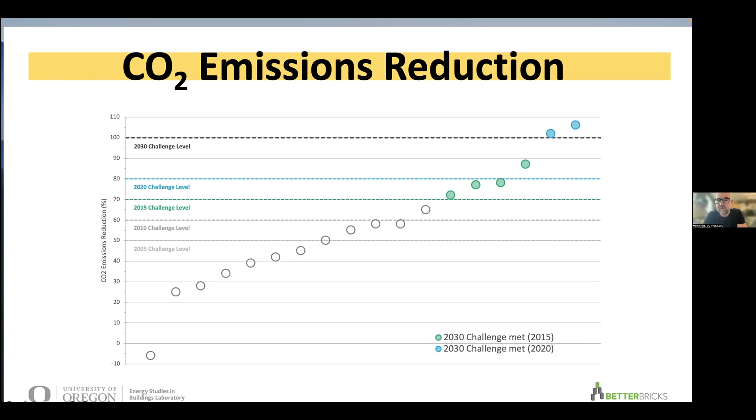This year we have 2 standout projects that met the overall 2030 challenge with net positive performance, reporting 106% and 102% CO2 emissions reduction. These 2 projects are both very ambitious and should be commended for the achievements they've made. There were 18 total submissions, and the total emissions reduction from all projects combined came out to 10,340 tons of carbon dioxide across the 18 projects.

6 total projects meet the 2030 challenge for their respective 2015 and 2020 levels. 2 projects were built to and meet the 2020 challenge level, which is 80% reduction, while also meeting the 2030 level, 100% reduction net positive. 4 projects were built to and meet the 2015 challenge level, which is 70% reduction.

The total area of the 6 projects that met their respective 2030 challenge levels was just above 1 million square feet, which is about 40% of the total building area across all submissions. This represents very impactful work occurring in the Pacific Northwest.

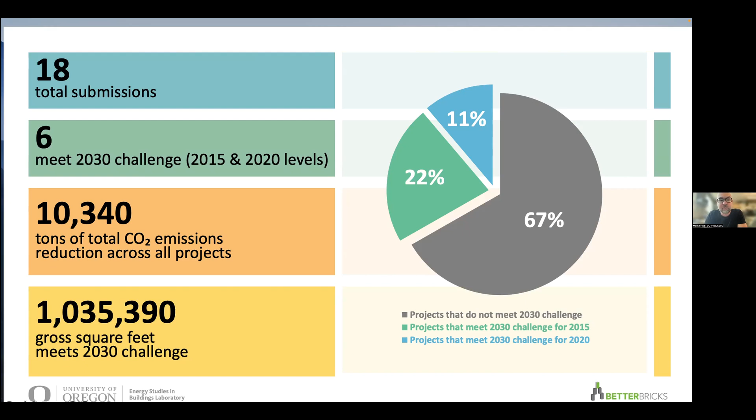A quick check of the 2030 pulse for our region. These numbers are the average CO2 reductions binned by performance and compared to CBECS baselines or calculated baselines via tools like the Zero Tool. Average CO2 reduction from all submissions is 56%. Average CO2 reduction from the 6 projects that met their respective 2030 challenge level is 87%. Average CO2 reduction from the projects that do not meet the 2030 challenge is still at 41%.

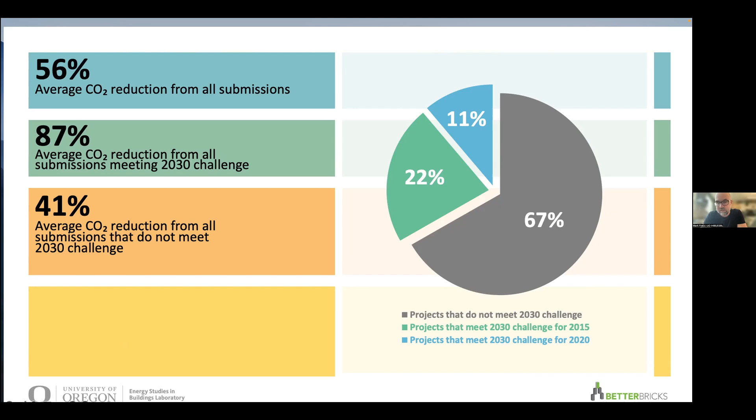Based on these calculations, the winning project, which you'll hear more about today, is a 2-story office building that is targeting net zero energy. It is a resilient design that will serve the Oregon Treasury Department's mission to be fully functional during and after a catastrophic event. The facility was designed to be a low energy building with an EUI of 26.9, and after energy offset from the on-site PV array, the project is anticipated to reach net zero energy on an annual basis.

In addition to net zero energy, the facility has achieved a platinum rating from the U.S. Resiliency Council, which is the highest rating possible, and the first building in the country to receive this distinction for base isolation. In terms of energy modeling, the project went through an extensive modeling effort to identify a multitude of solutions to make the building structurally and operationally resilient.

Some of the strategies and design features include a microgrid controller and energy management system to optimize building performance and resource utilization. So we would like to give a warm congratulations to the GBD Architects project team, and I'm going to hand it over now to see more about that project.

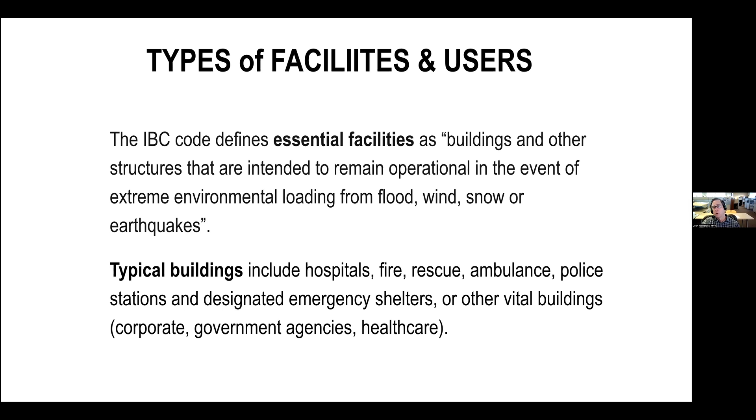But what we've done here is gone above and beyond just what a code building requires. I'll hit on that in a few minutes. We've actually targeted an exact performance for this structure through the use of base isolation, to remain completely operational, limiting damage not only to the structure, but more importantly to the non-structural pieces of the building.

And why the Oregon State Treasury? It's a question that comes up. Why would the Treasury need a resilient building? There are lots of reasons, a few of which are outlined here. But most importantly, I think if we do have a major seismic event here in the Pacific Northwest, those emergency dollars are going to need to be distributed to the people that need them most, and the Treasury is a huge part of that.

That's one thing I don't think a lot of people think of top of mind when you think about people in need after a large major environmental event.

As Mark mentioned, the Oregon State Treasury building is a 36,000 square foot office building, designed to withstand disruptions from all hazards, but most importantly, the Cascadia subduction zone earthquake at a 9.0 Richter scale magnitude.

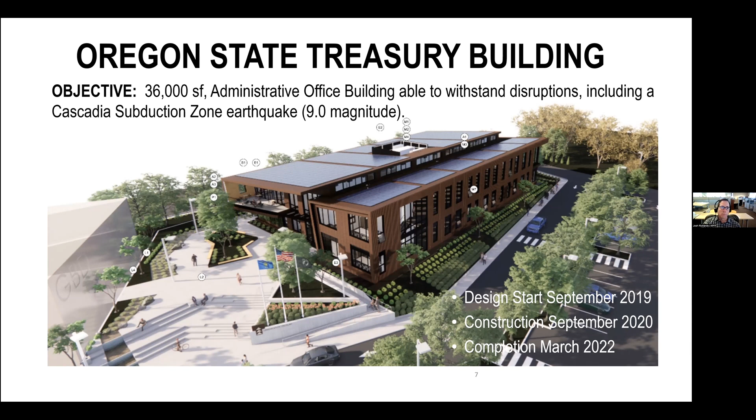We started this project with the team in 2019 and finished in 2022. KPFF and Glumac were actually involved before the actual design team selection, helping the owner build the resiliency goals along with WSP in that process.

So what makes a building resilient? If you look at the true definition, it's really the capacity to recover from tough events or outside factors, and threats and hazards are included in that.

Earth, Wind, and Fire, great band from the 70s. Obviously those are big ones that affect our community now. Floods and pandemics have also been something that's become more top of mind. The other thing not mentioned here is human threats. We're designing buildings now to deal with terrorism and other things that also play into the resiliency discussion.

So some of the strategies to incorporate into these types of projects: obviously the ability to survive and withstand these environmental events, having the independence of energy, sustainability is also critical, along with health and wellness.

Generally, you can design a building to be completely operational after an event, but if the energy, water, and utilities that go to it can't get there, then you're limited. These types of projects do have that independence built in for certain time limits to keep that operation going.

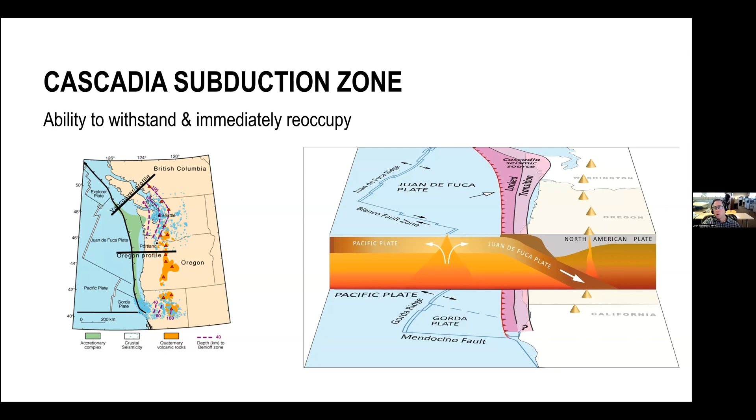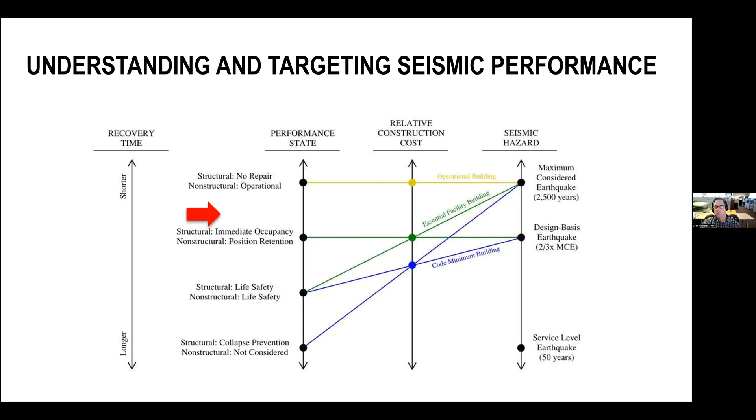Some other things relative to the architecture: looking at a lightweight structure, you're not going to typically use precast concrete cladding on a building that's base isolated. We used the exposed structure to limit how many finishes were on there and things that could possibly need minor repair. Also, you can see the structure and see if there was any damage or anything not functioning properly.

We used a braced frame for this, also utilized moment frames in the other direction, and limited how many hanging non-structural elements we had. Lastly, these base isolators all have to be protected over the life of the building, so generally they are contained in what we call a moat that is dry and generally unconditioned.

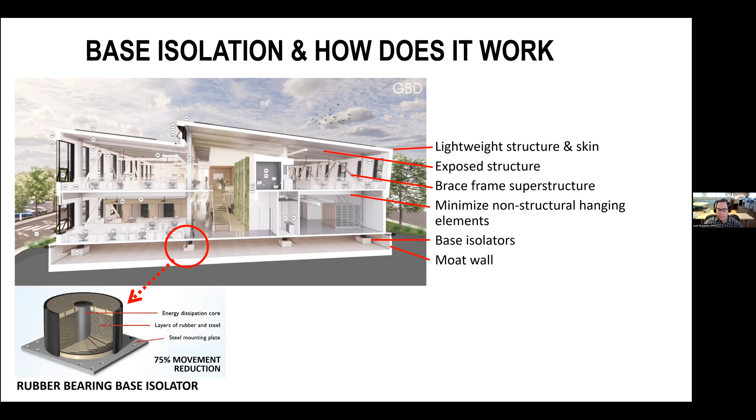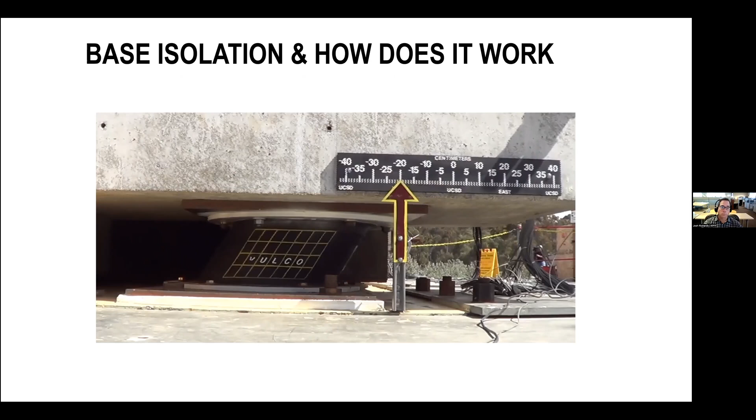This is a quick video of an isolator testing. When you do a base isolated building, you are dialing in these isolators to the exact friction they're going to see. Every isolator occurs under a column, and those column loads are all different, so this is where being conservative doesn't pay off in any way, shape, or form, because you don't want to overestimate how much weight is going to be on the isolator.

The isolator manufacturer selected during design actually goes through a testing program before providing them to the site that tests every single isolator to the exact load it's going to see, so we know exactly how much friction is built in. This is a quick video of the test, and I should note this test puts the isolator on its side, 90 degrees rotated from how it's going to act, so they can get the actual load compressed onto the system.

So that really just shows the isolator moving over that whole distance under the compression force that it's seen. These tests were all performed by Dynamic Isolation Systems down in Reno, Nevada.

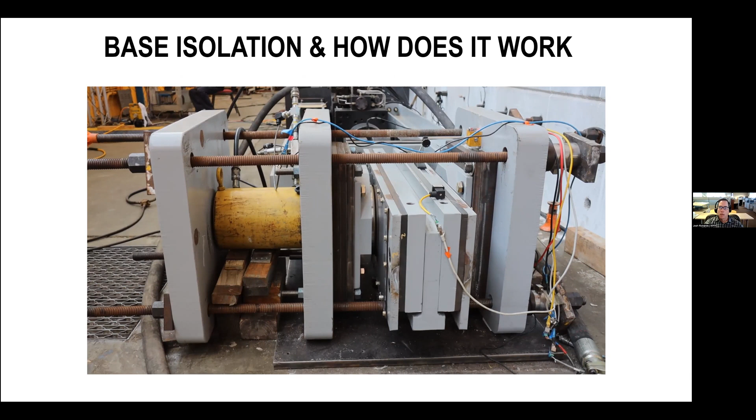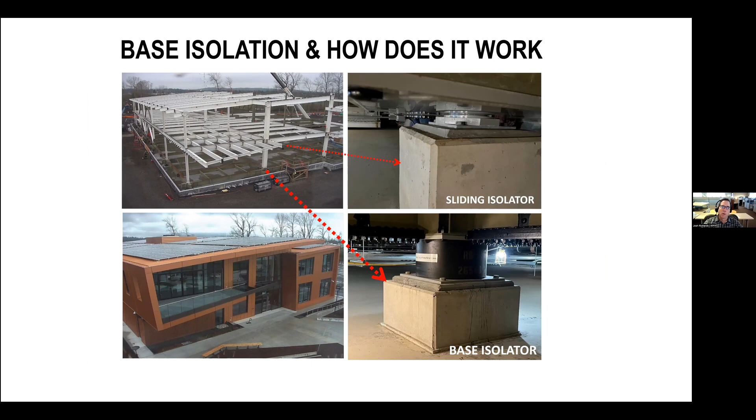This building can actually move up to 18 inches in all directions without binding any of these surfaces up. One or two breaks in these systems would affect the operation of the building afterwards.

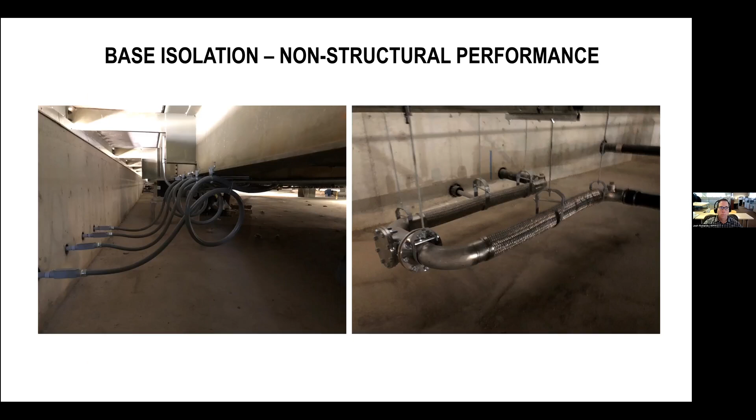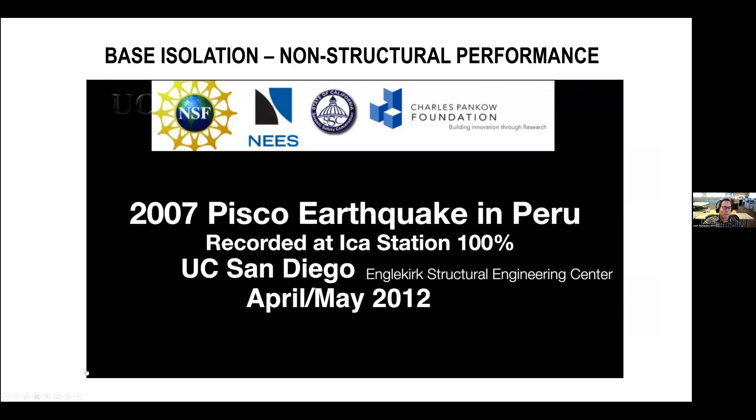I also wanted to show some testing here, recorded at Ica Station in Peru. I'm going to turn the sound off for this, but this is basically a shake table in San Diego. I believe they have an 8-story mass timber building on this thing right now.

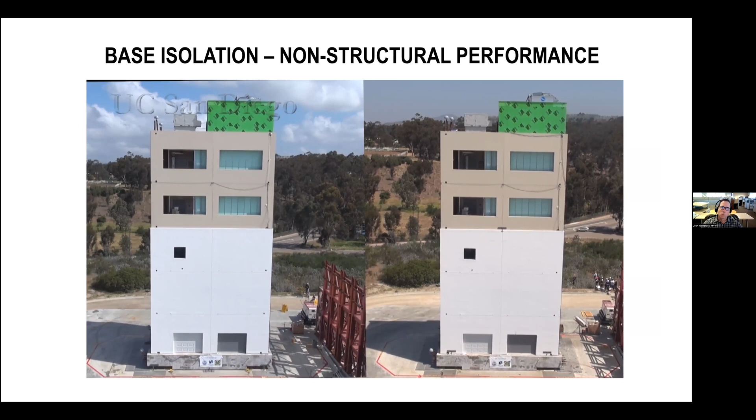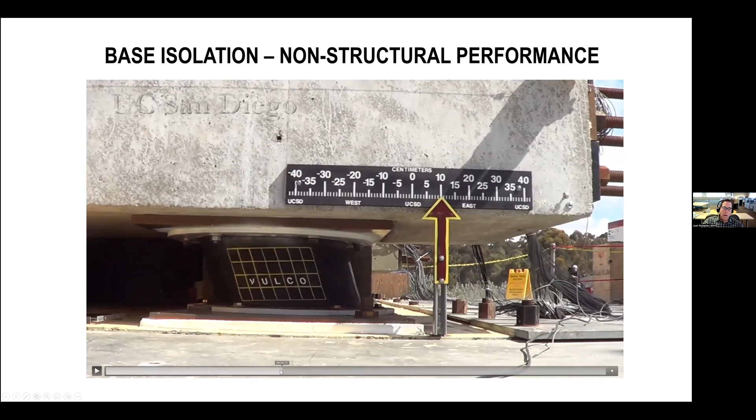I think what's a little more telling here—this is the photo I showed earlier of the displacement. I'm going to skip ahead. What's telling here is they set up a hospital room in this test to show how much damage you could see.

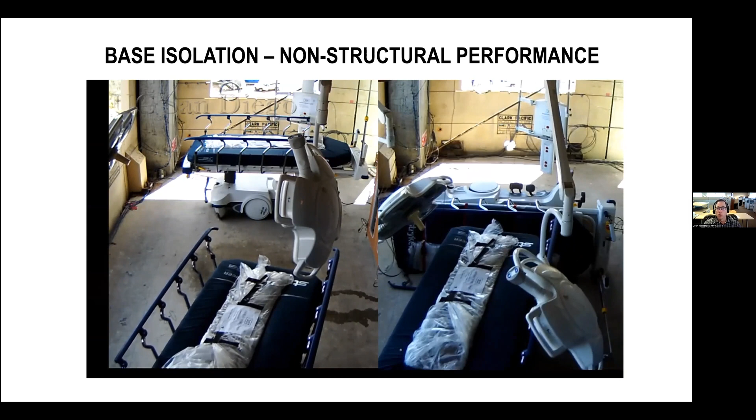If you look on the left, it barely moves under the base isolation—it's real slow. On the right, the operating gurney tips over, much more shaky than that. So that's a lot more telling in how those different buildings are going to perform.

I really quickly want to talk about the USRC. Mark mentioned that we got a platinum rating from the Resiliency Council. This is a similar rating to LEED, but requires a lot more structural analysis, incorporating everything from the structure to the curtain wall to the skin you're using to the partitions—everything goes into this evaluation.

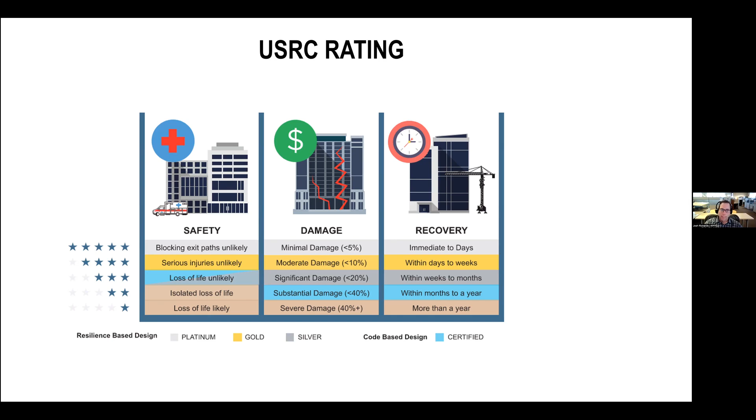It looks at three things: safety, damage, and recovery. Safety and damage are pretty easy to quantify. Recovery is a little more challenging, but there are a lot of metrics in the USRC design process that evaluate that. You get from 1 to 5 stars for all of these, and our building got 5 stars for every category and achieved the platinum rating.

So a couple of firsts, again, that Mark touched on: it's the first USRC platinum rated building in Oregon, and it was the first seismically base isolated building to achieve this in the United States. At the time of this rating, there were only 67 buildings in the world that had this. So we hope to see more USRC rated buildings in the future.

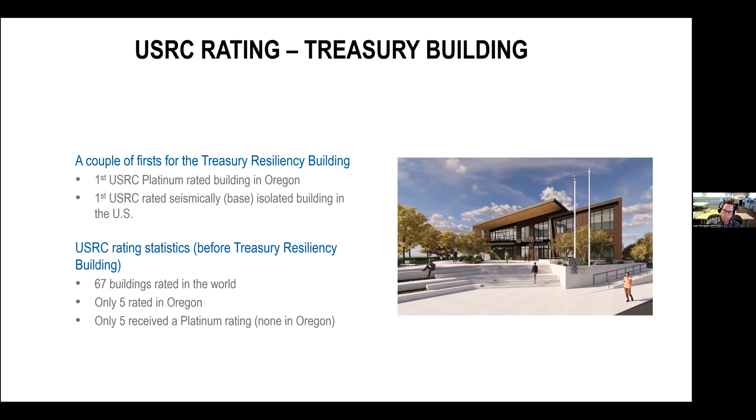So with that, I'll turn it over to Jeremy, who'll talk a bit here about mostly the electrical and efficiency in this building.

Thanks, Josh. Yeah, so in terms of energy efficiency, for the design of resilient buildings, it's more than just focusing on reducing energy consumption. Resilient buildings really require a high level of synergy between both the systems that are consuming the energy as well as the systems that are producing the energy.

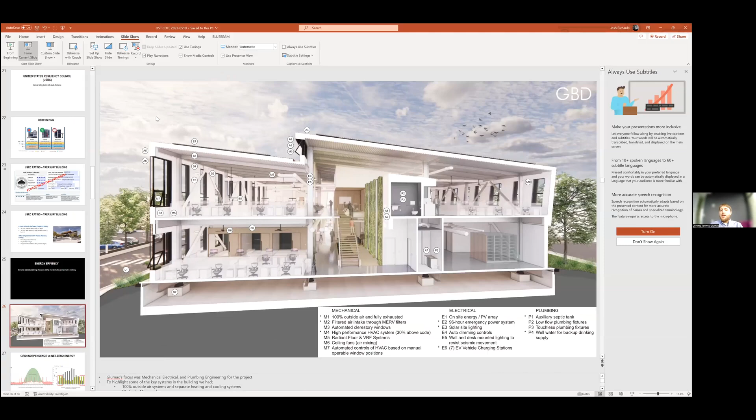Distributed energy resources, or DERs, need to be sized in alignment with the project building loads. And a microgrid controller needs to be able to monitor and control all the distributed energy resources and loads in real time. On the Oregon State Treasury building, Glumac's focus was the mechanical, electrical, and plumbing systems.

On this slide, we're highlighting a few of the key systems we included to support resiliency. We provided 100% outside air, along with separate heating and cooling systems, a microgrid that we'll talk more about in a bit, as well as a septic tank and well systems. The building also included several architecturally coordinated passive design strategies, including a central stair that supported natural ventilation.

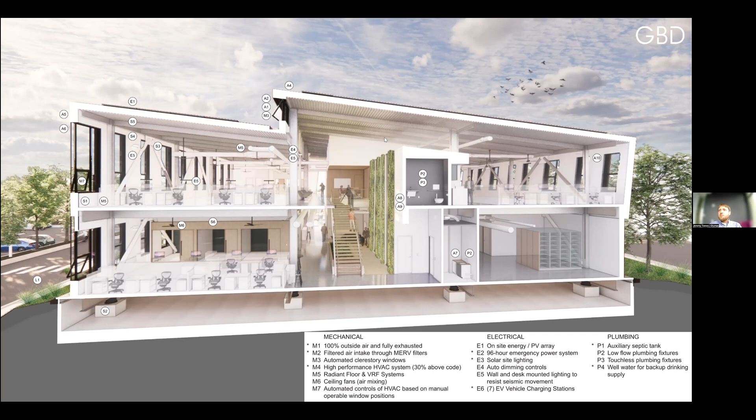One of the most interesting topics of discussion for this project is really the difference between a net zero or net positive project and a resilient or grid independent project. It's a lot more involved to design a resilient project compared to a net zero project because you need to have a level of grid independence.

On this chart on the left, we can see how solar production varies throughout the day—it's pretty intuitive, there's going to be more sun produced midday. In the evening, nighttime, and early morning, you're going to have more building load than solar production. For grid-tied net zero projects, that's not going to be an issue because you're able to use the utility as an energy bank to draw from when you're not producing power.

But for resilient buildings looking to be grid independent, you really need another source of energy storage to rely on during times when your energy systems aren't producing power, yet your building is consuming energy. The graph on the right shows, not just from a day perspective like the one on the left, but over the course of the year, that energy production on average is also going to be lower in the winter, and often your energy consumption will exceed your production.

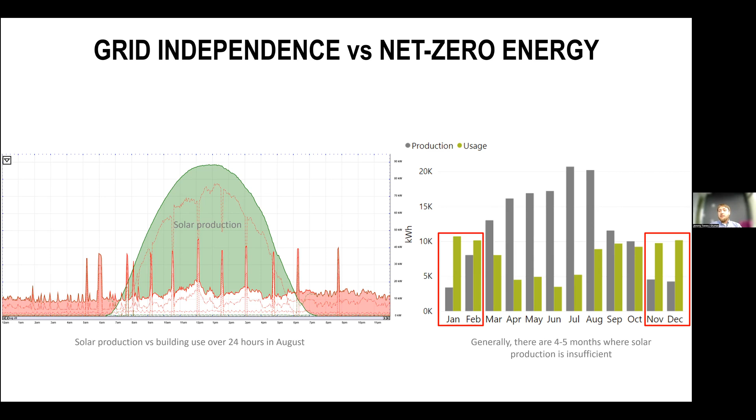So not just from an energy storage standpoint, but also from an energy production standpoint, you really need to consider what type of energy sources you're incorporating onto your resilient building that allows you to be grid independent throughout the year.

Resilient buildings also have another challenge: demand and energy use at extremes. The worst times of the year may not necessarily be reflected when you're looking at them compared to the annual energy consumption.

Looking at three different mechanical systems evaluated on this project: a VAV system, which is one you might see in many buildings today, has a lower energy performance. The DOAS system with VRF is often employed on more energy efficient buildings today, benefiting from heat pump technology—it typically has a coefficient of performance of 2 or greater, which reduces demand. This is the system that was employed at the Oregon State Treasury building.

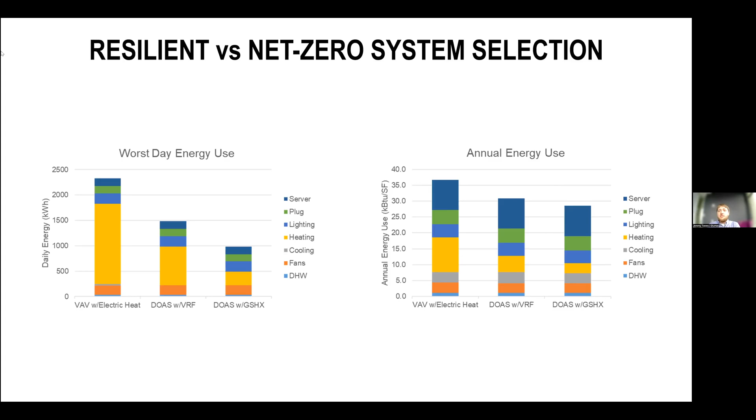Another key focus for resilient buildings, beyond system selections, is ensuring they remain resilient as building owners adjust operations over time. To achieve that, we want to make sure there's an energy management system in place to monitor how energy use changes over time.

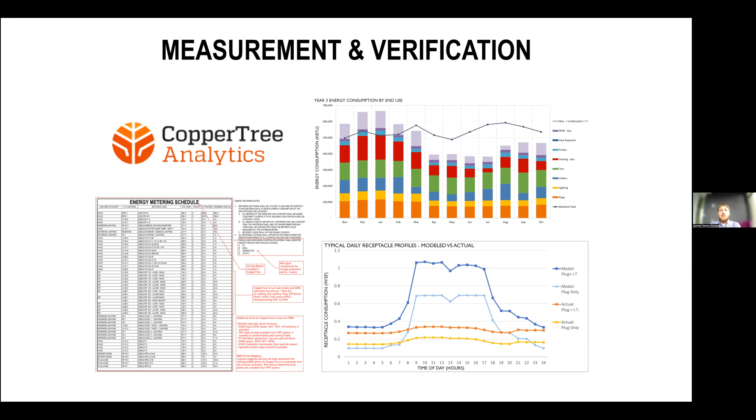At the Treasury building, we're using CopperTree Analytics, a third-party measurement and verification company that provides continued support and monitoring of how the building is performing. So we talked about how resilient buildings use energy, and now what we needed to do was design a system capable of providing resilient power to meet that demand.

Using a series of different modeling software that evaluated microgrid technologies, we're able to import energy modeling data associated with our building and evaluate different technologies - solar, battery, generators - to determine what mix of distributed energy resource systems would be most appropriate to meet the goals of the project and what size each of those systems should be.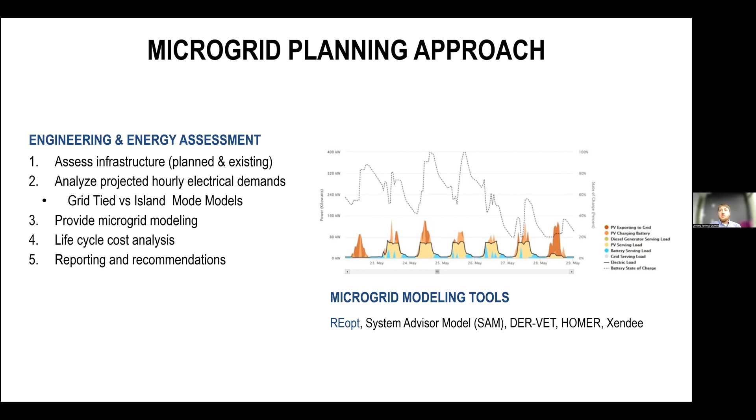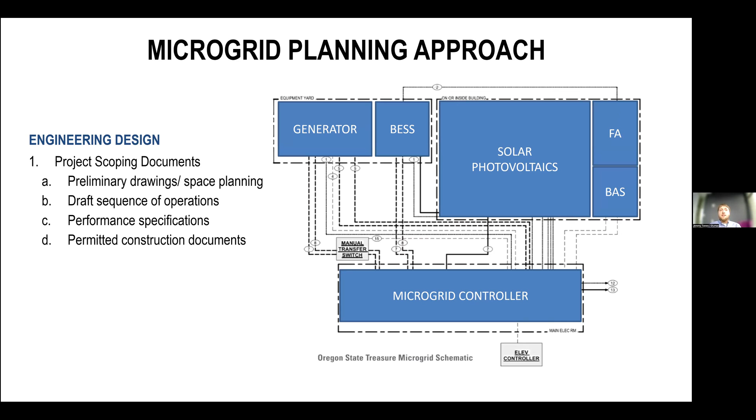Once we worked through general system sizing from an energy standpoint, we were able to collaborate as a design team to provide space planning and figure out exactly where all of these components would live and how they would interact with each other to meet the operational intent and system functionality that the Treasury was looking for.

One interesting thing about microgrids is that they can provide a range of different modes of operation. For the Treasury project specifically, the focus was on resiliency and providing backup energy systems always on standby to provide the maximum operational runtime in the event of a disaster. The microgrid controller also has the ability to allow the building to operate in a range of different operational modes in the future, should they choose different options.

Some of those options would be emissions reductions, demand management, or optimizing for financial payback. It's important to remember and convey to the owner that these systems are very complicated, and the facilities group needs ongoing training and support to operate and maintain them. We've partnered with Schneider Electric, the company that provided the microgrid, for ongoing training and support as needed.

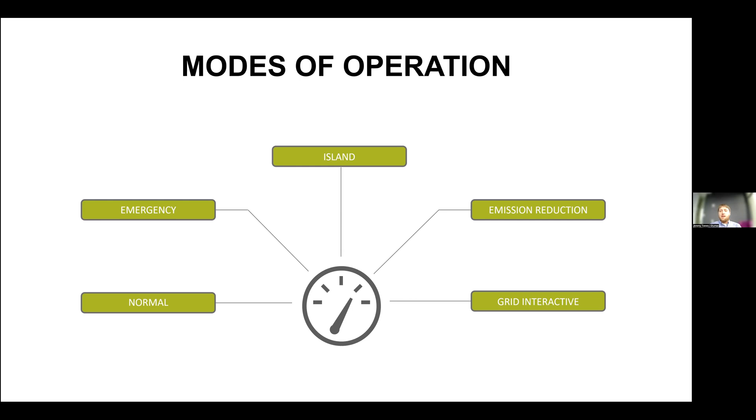In terms of the components included for the microgrid at the Oregon State Treasury building, we have a solar PV system at 238 kW, a battery energy storage system at 250 kilowatts, as well as a diesel generator at 300 kilowatts.

One of the greatest things that provides the most significant value for the Treasury in having a microgrid with multiple overlapping distributed energy resources is that not only does the owner get the benefit of having redundant systems - if one goes out, they have another backup system on site - but the microgrid controller enables all the distributed energy resources to operate as a collective, so runtimes are compounded in an optimized fashion rather than just stacking one after the other.

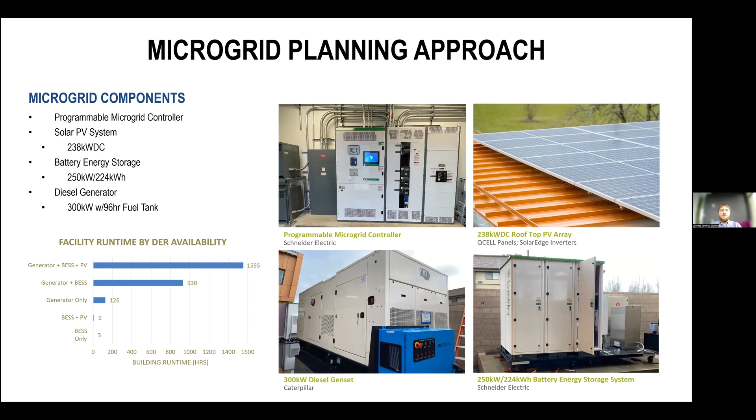One important consideration when incorporating a microgrid pertains to the transitions between different power sources. In general, microgrid components are going to require what's called an open transition, or break-before-make transition. Open transitions result in momentary power blips on the order of a few milliseconds, but many systems like motors and heaters will ride through these blips without any issue.

But other more sensitive electronic equipment - computers, controllers, server rooms, AV equipment, etc. - will want some sort of backup power system, a UPS or other integral battery backup, to allow them to not go through a reset process if they're part of the critical operations of a facility.

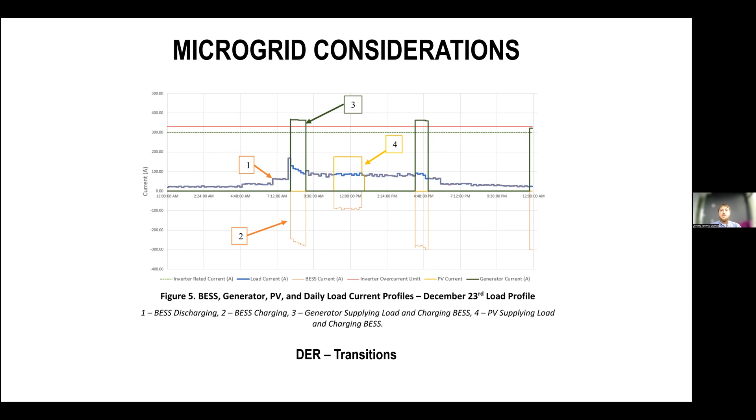So yes, we've covered quite a bit in just over 10 minutes, but hopefully it gives a brief snapshot of some of the systems, electrically and mechanically, at the Treasury building. It was a great project to be part of, and there's a lot more to share if time allowed, but I'm always open to sharing more at another time.

The final thing I wanted to highlight is that by focusing on resilient buildings, it's made net zero easier and achieved a lot of secondary benefits as well. In addition to reducing energy use and providing optimized system operations with the potential to be net zero, it also contributes to the greater resiliency of the utility grid by reducing peaks and valleys of demand, and allows the grid to become less carbon intensive because it's not having to maintain as many spinning reserves of carbon intensive energy sources. So there are a lot of benefits to incorporating resilient building approaches on projects looking forward.

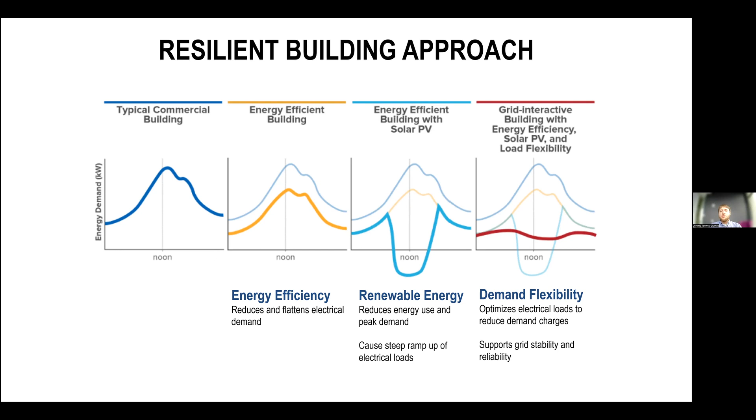Another key strategy is building sustainability—minimizing impacts on the environment, meeting sustainability benchmarks, and supporting resilient design. These requirements are typically very prescriptive, and today we don't have time to go into that level of detail.

Unlike sustainability, the health and wellness aspects of the design are more subjective, more of an ambiguous gray area. It's hard to put a number on.

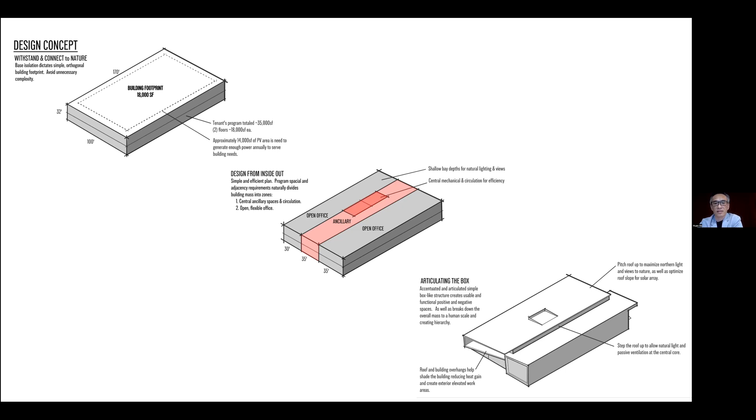Again, we designed the building from inside out, organizing the massing by uses, then articulating it to reflect the interior space layout.

Again, we design the building from the inside out, and at the end of the day, it's all about the human using the space. The simple floor plan divides into zones—the central zone is circulation, meeting spaces, and support uses, while the outside is open, flexible office space that maximizes the use of natural light.

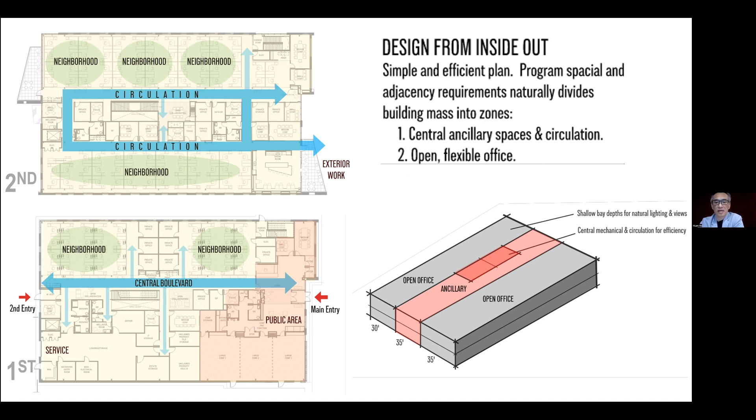Again, articulating the mass—the idea is to slip and slide the massing on the second floor in the east-west direction, allowing us to maximize the view to nature and abundance of fresh air and natural light, while still controlling sun glare, as well as breaking down the overall mass into human scale. We also bring biophilic design elements into the building by incorporating green wall, preserved moss, and warm white oak wood panel.

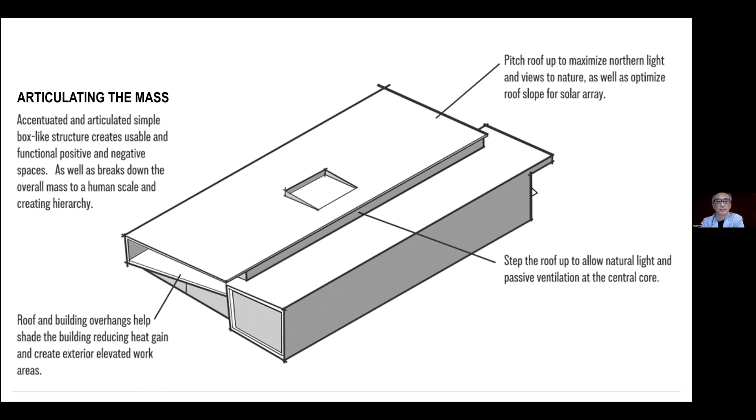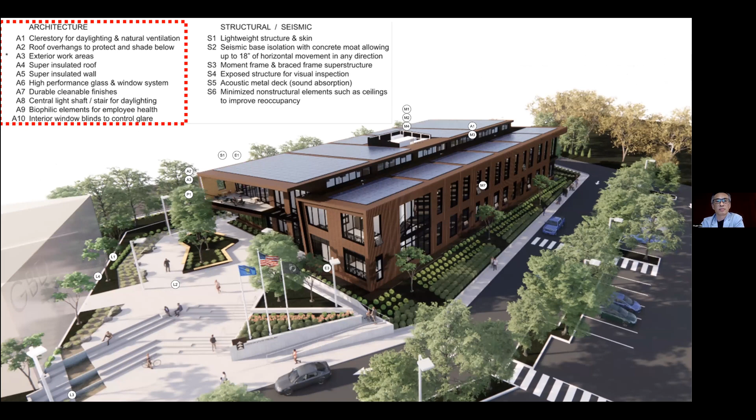Here are renderings of the overall project with features of resilience that Josh and Jerry were talking about.

In recap, the resilient structure, energy independence, sustainability, and health and wellness that make up resilient building—we call it a super building.